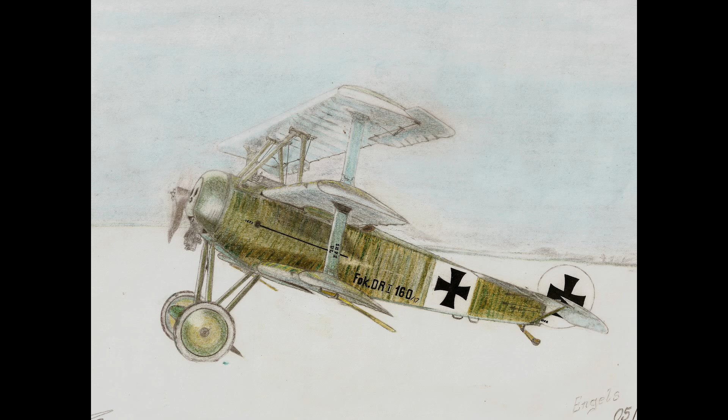A childhood dream grows 3 wings. Ever since I can remember, aircraft have been the main focus in my life. If asked for a reason, I cannot provide a sufficient answer to it. It just was like it. At the age of 12, I persuaded my father to take me and my best buddy Wolfgang Schuster to the Deutsches Museum at Munich. I was fascinated by the reproduction triplane, all painted red, that hung from the ceiling there. So deep was the impression that I told my dad that I was going to build one myself. He tapped the little youngster's head and said, "Sure you will," which did not sound convinced at all.

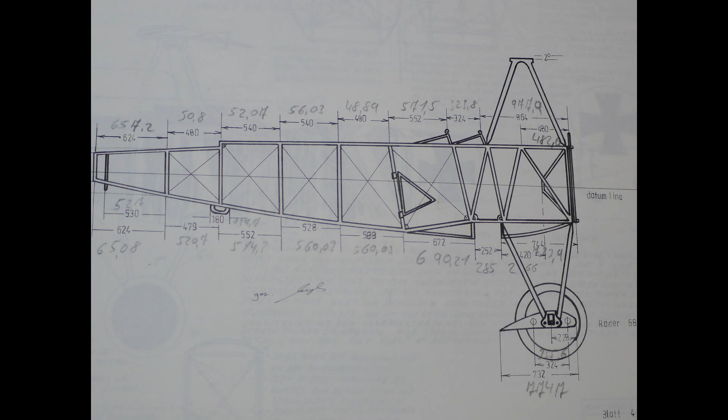Anyway, I wanted to build it, so I started collecting documentation about how it was designed. And there it was, the growing understanding that no one really knows. The information found was contradicting and ranged from obviously wrong to close to what it actually looked like back then. The people I came into acquaintance with about it differed from being very helpful and sharing to "I show off what I have, but you ain't getting anything from me."

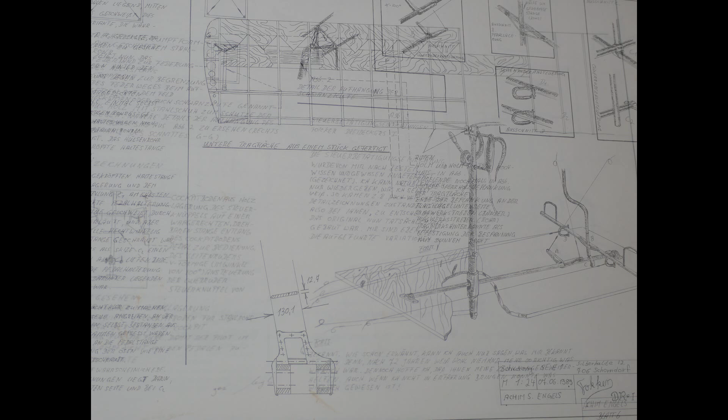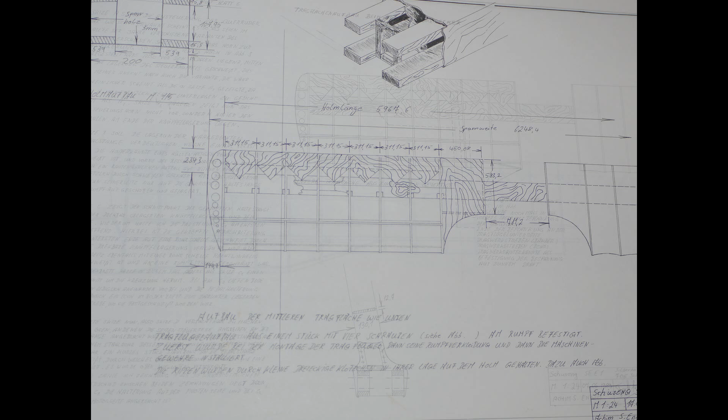It was a lesson learned that things just a few decades ago are lost, and sketches of the past created a not so accurate image of the truth. This holds true for events that happened as well as for design features of an admittedly technical thing many talk of: the Fokker triplane, the famous mount of a famous historical figure, Manfred Freiherr von Richthofen. There was I, young, untrained, with just a dream. No money, no idea, no plan.

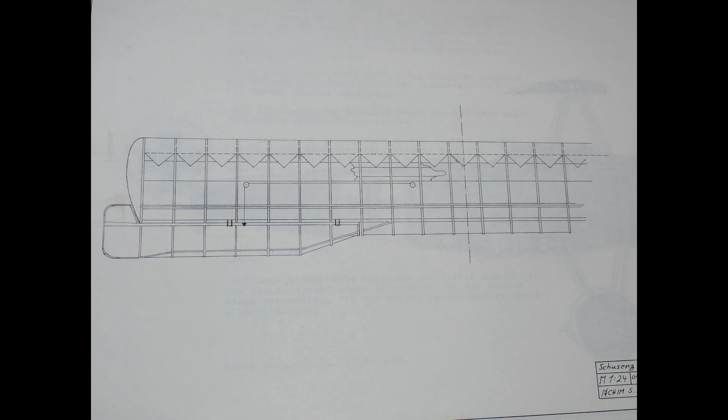So I started to develop a copy of the Fokker triplane in 1/6 scale with the intention of making it a radio-controlled model that should be built as close to the original as possible for me. After finishing the fuselage of the model in 1/6 scale, I decided to go for full size, which could not be much more difficult, just bigger. On the full-size aircraft, I started with the wings, however.

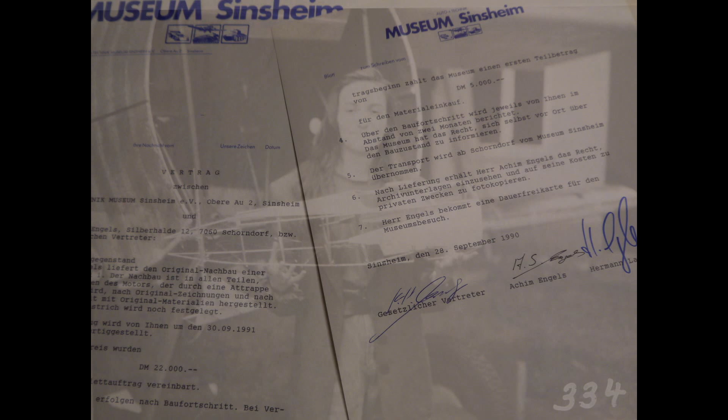But how could I start with no location and no money? So I sat down and wrote letters to all museums I could reach in Europe, asking if they would be interested in a Fokker triplane reproduction. It was only one museum that said yes. That was the Technik Museum at Sinsheim. They agreed to pay 22,000 marks in steps until the project should be finished. And so I began my first triplane at the age of 16. And here is its story.

It was nothing but pure luck that I fell in love with that little Fokker triplane. During construction of the wing ribs, I realized soon that the triplane provided a very big advantage compared to other aircraft. All 3 wings carried the same airfoil, and there was no tapering of the wings at all along the whole wingspan. In fact, that meant that I only needed to construct one masterpiece as a template. Since about 60 almost identical ribs were needed, this circumstance was appreciated very much.

The outer shape of the airfoil was transferred to large-size plates of plywood. These sheets have been produced of Finnish birch aircraft plywood, and the dimensions have been 1.5 meters times 1.5 meters. The ribs have been drawn onto the sheets in a way that allowed to use most of the material. One of these large plywood sheets with the ribs drawn onto was laid upon 2 other sheets that have been left blank. The whole thing was secured against slipping away by clamps. Then I used a pad saw to cut out the raw ribs.

The next thing I had to do was the finishing of the rib cap strips from strips of 9 by 6 mm of fir. On their 9 mm wide side, the strips got a 3 mm deep groove. The width of the groove was wide enough to let the plywood rib webs go in. These cap strips have been pushed onto the outer edges of the rib webs to form cap strips.

After that, the lightening holes of each single rib have been cut out using a hole saw. What was still missing was the strengthening strips of plywood glued to the sides of the rib webs, as well as the cutout for the main wing spar and the rear spar. By then the ribs were finished as raw pieces. I then turned my attention to the production of the wing spars of the aircraft.

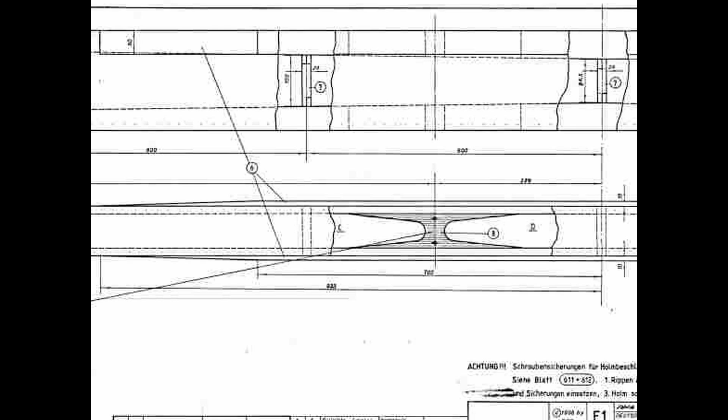Each spar consists of 4 flanges made from spruce. The thickness of these flanges does not change through the whole wingspan, while their width tapers towards the wingtip. 2 of these flanges have been put together by means of plywood sheets to form a box spar. At first, one of these plywood covers was nailed and glued to the flanges.

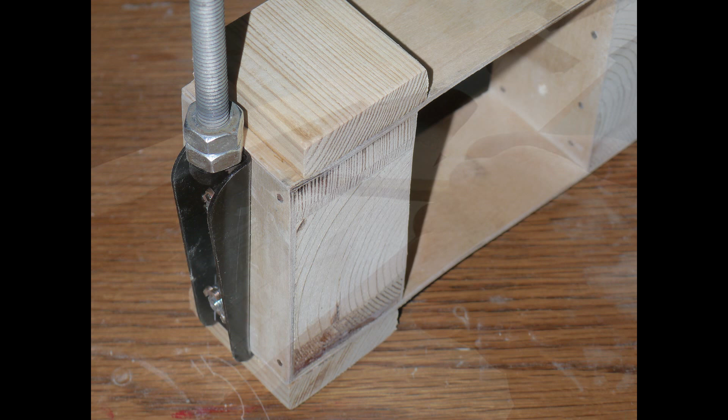At the locations where the wing fittings had to be, special filling pieces of wood have been glued into the box spar before it was closed on the other side. These filler pieces prevented the sheets of plywood from being pressed together by the force of the screws to secure the fittings and distribute the loads applied to the screws into the box structure. Following this, the box spar was closed by the second sheet of plywood on the opposite side.

2 of these box spars have been put together again using plywood sheets on top and bottom to achieve a single box type wing spar with the dimensions of 100 mm by 200 mm. During this procedure also only one side was closed while the other side was left open. At regular distances special bulkheads have been glued inside the wing spar to prevent it from being twisted by the forces in the air. The design of all 3 main spars was the same. The only difference lay in the wingspan and the design of the fittings.

All 3 wings have thus been constructed in the back room of my father's electronics shop in Schorndorf. There we established some kind of a little workshop. Of course, the conditions have been somewhat weird, but it did work. The wing spars themselves have not been very long, and not that cumbersome. This changed the moment I started to pull the ribs onto them. The depth of the wing is 1 meter, a tiny aircraft.

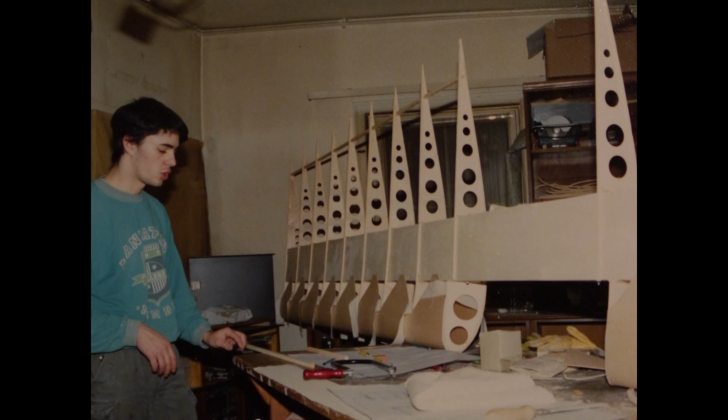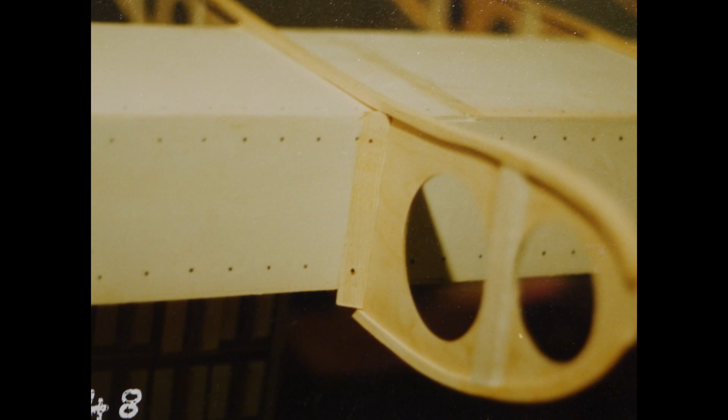The lower wing was the first to be done. The ribs have been pulled on and the small supporting spar at the end of the wing was pulled in. The connection between the ribs and the main wing spar was provided by simple triangular pieces of spruce that have been tacked and glued to both sides of the rib ply on the spar. At the sides of the rib web, these pieces covered the full depth between the upper and lower rib flanges. At the top and bottom side of the spar, these triangular spruce pieces were only 40 mm long and have been located at the back side of the wing spar only.

The structure of all 3 wings is the same. After the lower wing was finished as a raw piece and all upcoming problems had been settled, it was relatively easy to assemble the remaining 2 wings. What still provided difficulties to me was the lack of space available within our small workshop. To proceed with the assembly of the middle and the upper wing, we had to find a place to store the lower wing in the meantime. It was considered best to hang it from the ceiling to get it out of the way. I did the same with the middle wing when completed.

Only while assembling the upper wing, further minor difficulties arose, with a wingspan of more than 7 meters. Now we had to use the full diagonal of the room to get the wing finished. Step by step, the wings of one of the most famous fighter aircraft of the First World War grew up in the back room of my father's electronics shop.

It was for sure some kind of a magnificent feeling to see something old grow up new. The euphoria became bigger and bigger with every single part that was added to the project. Slowly but steadily, under our hands, an aircraft was put together. The dream that raced within my young heart some years ago now, in the truest sense of the word, got wings.

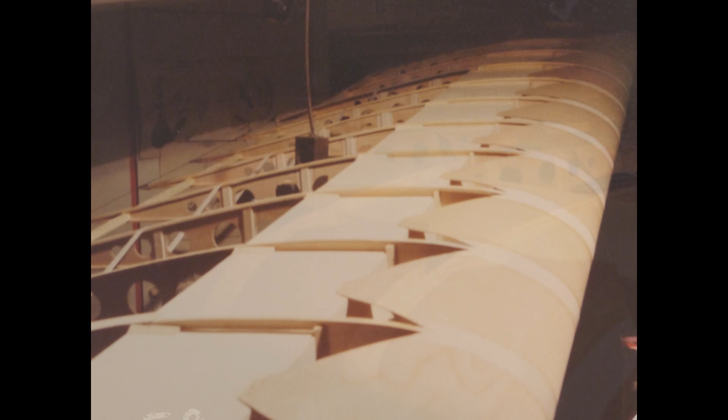All over Schorndorf I could not find a reliable garage or small workshop where I could carry on with the work. The only room that I found was a part of an old barn I rented eventually at 150 German marks per month. This room within the barn was an open space and was located some 5 meters above the floor level with a space of 7.5 by 4 meters.

Worst of all, in the center of this place was a big hole measuring 2 by 2 meters, for an old not working elevator was situated there. The only securing from falling down was provided by a fence of simple wood boards. There I now had to put the wings, since they hindered the work in the workshop, by their size, immensely.

Through a window in the back of my father's shop, the wings were brought out one by one. Following this, they have been put onto the rooftop of an old Ford Fiesta. With walking speed, we carried them the way to the barn, which was 3 miles away in town. Carefully, we brought them upstairs, where they awaited their covering with linen fabric.

Meanwhile, the work proceeded at the workshop. Since the triplane used in large number steel tubing construction that was welded, I now had to familiarize with that kind of work. Again, the clever books have been consulted. But there is a long way from theory to learning practical useful skills. Of course, my first welding trials could rather more be compared with the work of roasting jack than with good welded seams, but I managed to handle it eventually.

The first part I dared to construct was the triplane's rudder. Work went well ahead, and the result was a beautiful comma-shaped rudder, a motivation piece. Shortly afterwards, the ailerons followed, then the stabilizer and the elevator. These parts also have been stored away in the barn.

Now heavy work was to be done, since the steel tubings of the fuselage structure had to fit exactly one to another to allow a good welding result. To achieve this, I used simple rasps and files and worked on each tube by hand until it did fit. The welding job was done in a jig, which was a simple self-made wooden construction to hold all the tubes in place. A regular heating of the tubes within the structure is important, since the whole structure would otherwise get twisted due to uneven heating.

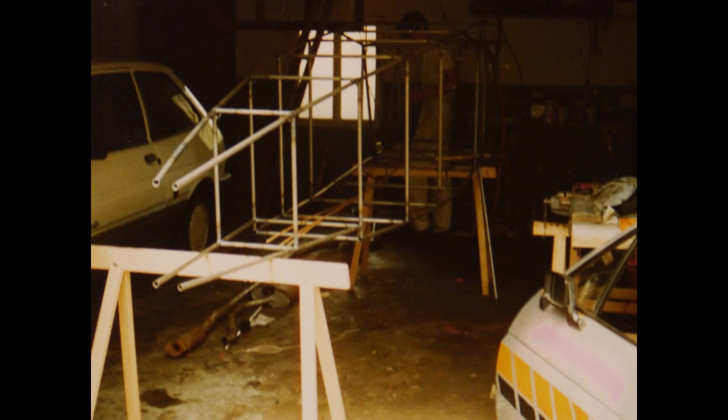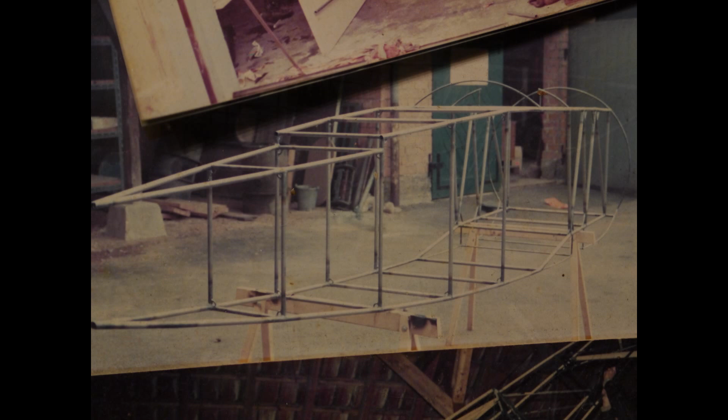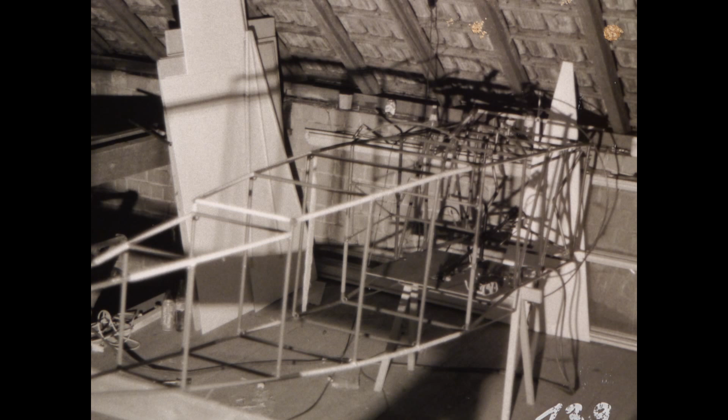The working on the fuselage frame was carried out in the garage of Wolfgang Schuster's home. The whole fuselage frame was covered by a protective coating, followed by olive green color after the welding was done. This again happened at the barn, together with all other steel tubing components that have been finished earlier. At all the locations where later the fabric covering should be fixed, the tubes have been wrapped by 30 mm wide strips of linen fabric. To this wrapping later the covering could be glued and sewed.

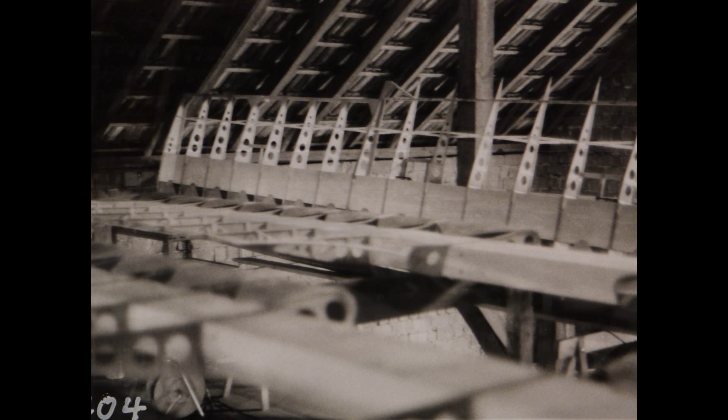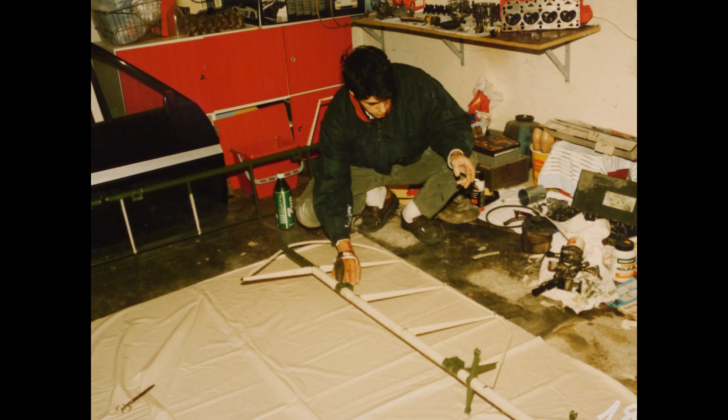Meanwhile, the space available at the barn was almost filled up by aircraft components. One could hardly turn around anymore. It also was a constant back and forth between my father's electronics shop, Wolfgang Schuster's garage and cellar, and the barn. The covering procedure was a first for me and was tried by using small self-built wooden frames, and after this went well I started to cover the smaller surfaces such as rudder, elevator and ailerons.

All covering works have been carried out inside of Wolfgang Schuster's garage again. Garage days. Following these smaller parts, I also brought the lower wing to the garage and started covering it. This also went well without any problems. The most time-consuming process while covering was the stitching of the fabric onto the ribs. To allow the fabric to be stitched to the ribs, they have first been covered with fabric that was laid upon the flanges and glued to the rib webs.

Unfortunately, we have not been able to cover the middle and the upper wing in the garage too. The garage was simply not long enough. Already while covering the lower wing, no single sheet of paper fitted between the wingtip and the closed door. For this reason, I covered them at the barn. The fuselage again was covered inside the garage.

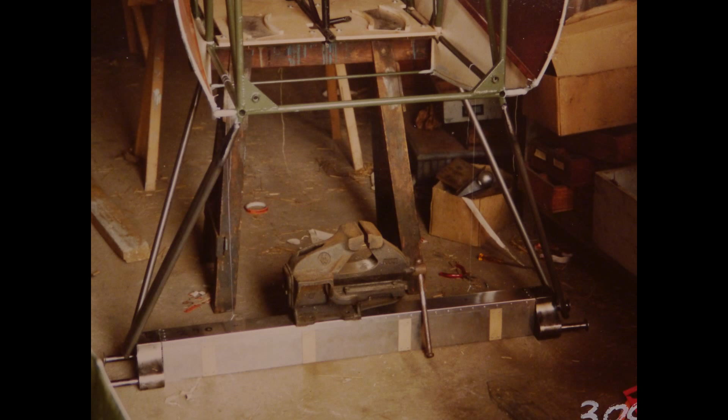Now we proceeded with the construction of the landing gear. There have been difficulties with acquiring the streamlined tubings needed to go ahead. The material came from the US, since there was no company found that produces such tubes here in Germany. I did not want to make it myself at the time, nor did I know at the time how to do it. It would have been possible, but also rather complicated.

The wheels turned up on their own. Within the barn where the aircraft parts had been stored, we found an old fire car, a trailer. Its wheels were exactly the same shape we needed. Diameter, dimensions, number of spokes, shapes, everything was a perfect match. The only misfortune was the profile on the tires.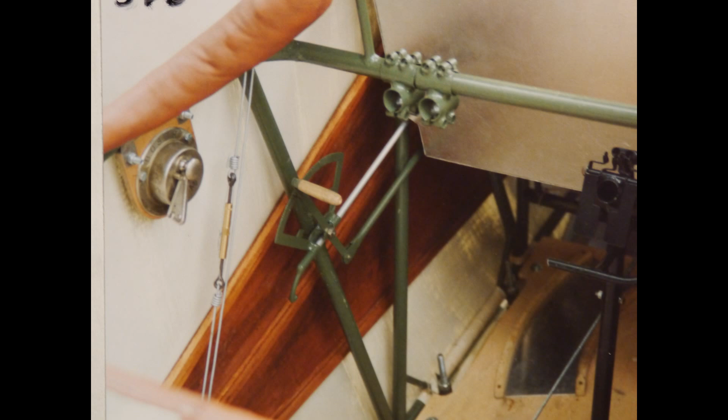There they stood now, really finished, all the single construction units of my first reconstructed and hand-built aircraft, the Fokker Dr.I, or Engels E1, as I call it since it is not built by Fokker, but just a copy. The date of finishing and the time of being shipped to the museum at Speyer also approached unstoppably. Up to this point, I simply had to hope that all parts would fit together, since we worked according to my own drawings. For this reason, we decided to assemble the aircraft at least one time for a final testing.

The aircraft became the sensation of town, and we hardly could finish the work in time given all the interviews requested. But despite anything that tried to keep us away from finishing work, we did it right in time and prepared the aircraft for its journey to the museum. The day came, and one evening also the truck of the museum. With a heavy heart, we brought the plane onto the truck. First the wings, then the stabilizer and rudder, as well as the elevator. At last, the fuselage. It was raining that evening. The truck disappeared, and with it my childhood dream. Two weeks later we also drove to the museum to assemble the aircraft there.

What still was missing was the engine and the propeller. These parts we should deliver as reproduction dummy parts as well. One more time we went to visit Speyer to make last modifications on the paintings and markings. At the same time we painted all the serial numbers onto the right places. Soon afterwards, the dummy propeller and engine also had been finished and could be installed by us.

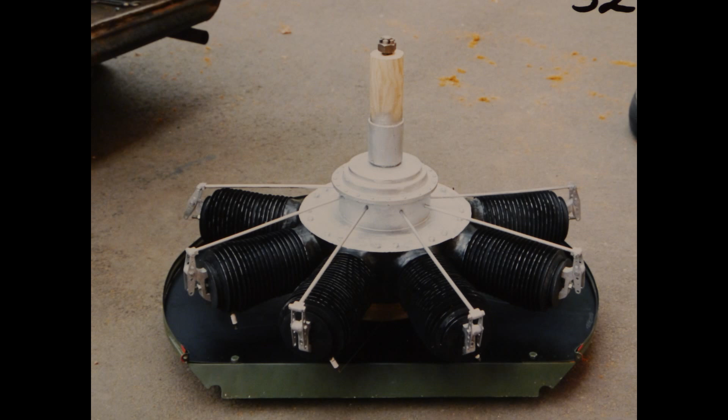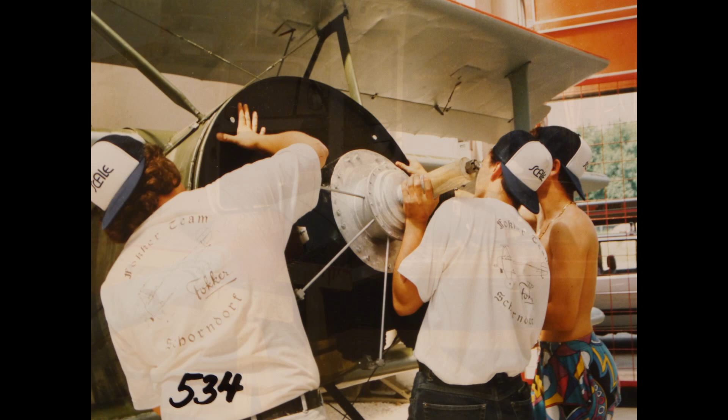Those items were supposed to be interim parts only for decoration, since the museum staff wanted to look for a real rotary engine to be put in. As soon as they saw our reproduction engine and dummy propeller, they said it will do as it is, although we told them that the dummy motor would be an optical copy of the 100 horsepower Oberursel U1 and not of the UR2 as used by the triplanes. By now the completely finished Fokker triplane hangs from the ceiling of the museum.

I do consider this first static reconstruction of the Fokker triplane as having been the first step in the right direction of providing a basis for discussion. Based on the earned knowledge, I wanted to evaluate errors and mistakes to assure the historical knowledge will be saved for future generations in the correct way. For sure, mistakes were made with that plane during the course of reconstruction, but wherever possible, they have been corrected. For sure, my construction drawings were always kept up to date, corrected and improved.

I judge my work from the point of view of the experimental historian and in no other way. I am not simply interested in producing reproduction aircraft lookalikes, but rather endeavor to base my documents upon historically authentic sources. The triplane featured in this article was my first step, a combination of childhood dream come true and learning experience in all respects, whether historical study, research, handcrafting skills and understanding of aviation's nature, as a tool and weapon in human conflict, or bringing together people.

I am very happy with that first project of mine, which also formed me as a human being and laid the path for a future that created almost 20 flying airplanes today that have been made by my hands. Fun it was, educative it was, fun it will be, and I will keep on learning and encouraging others to go for it, if aircraft building and flying is their dream. Only you can do it.